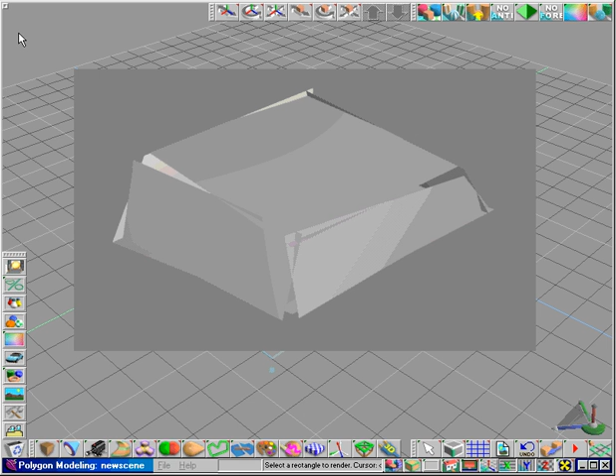The Triangulation tool can be used to divide faces into triangles and fix rendering artifacts that arise from faces that are non-coplanar. It is important to note that the Triangulation tool works on the entire object only, not on individual or select groups of faces. Also, the action cannot be undone.

From the Object Library of the Polygon Modeling Project, click and drag 2 copies of the candlestick object to the middle of the screen. Note how the faces in the middle portions are not coplanar. Select the second copy and click the Triangulate tool once. Note that once an object is triangulated, subsequent clicks on the tool will not further triangulate the faces.

Now do an area render. Note the difference in the look of the 2 candlesticks. Even though the first one has non-coplanar faces, the surface still looks smooth. This is because TrueSpace has Triangulate for the render engine turned on by default. This may not always be desirable.

However, by turning it off, note what happens to the first candlestick when we do an area render again. Notice the shattered look from all the rendering artifacts. Triangulation will avoid these regardless of the rendering settings.

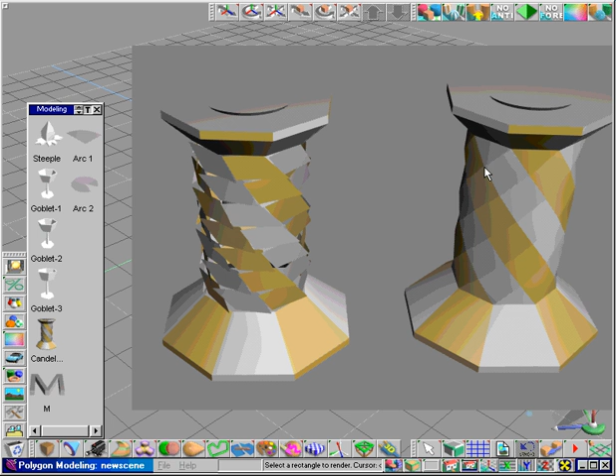Even though triangulation cannot be undone, it can be minimized. Select the triangulated candlestick and Boolean subtract the plug from the top. Notice how the faces on the base and the top have had the triangulation removed. The middle faces will remain triangulated. Undo the Boolean operation.

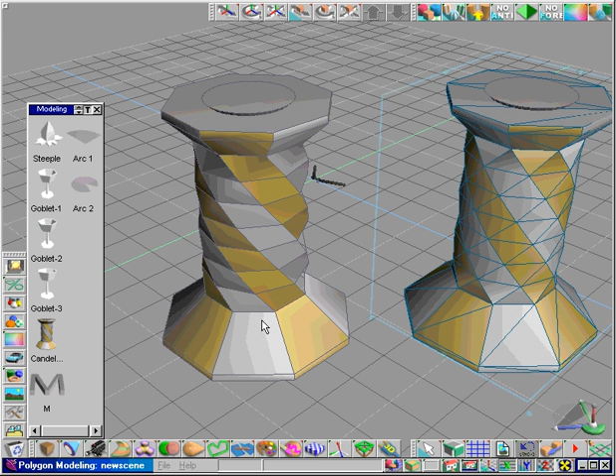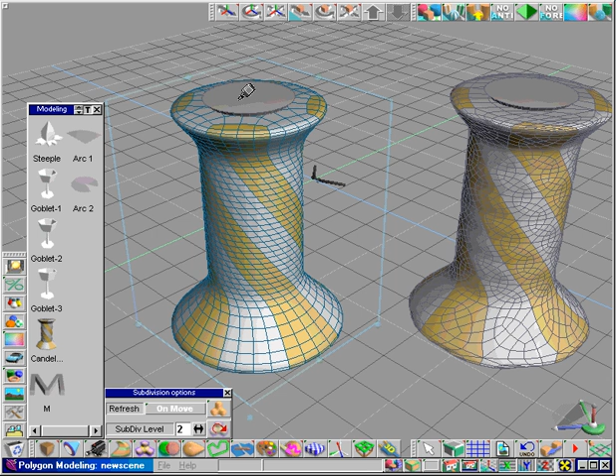Another use for the tool is preparing geometry for work with other tools. Click on the Surface Subdivision tool for each candlestick and note the difference of the division pattern created on the polygonal copy as compared to the triangulated copy. Convert to a polygon mesh and subtract the plugs from the top of each. The triangulated mesh pattern will no longer change.

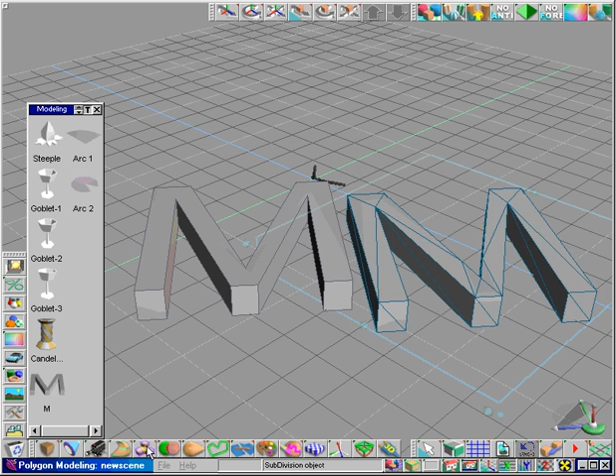Delete the candlesticks. Drag 2 copies of the M from the Object Library to the grid. Triangulate the second. Now surface subdivide both of them. Notice the improper surface construction on the first. Triangulation eliminates the concave faces and the resulting errors possible with faces that have more than 4 sides.

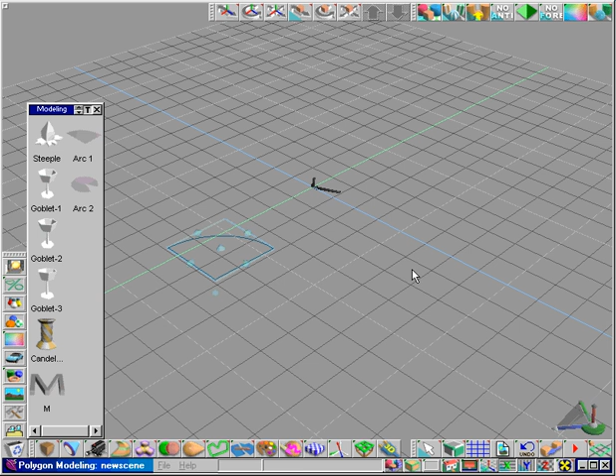Delete the letters. The Triangulation tool can also be used to divide faces in a radial manner. Drag arcs 1 and 2 to the grid. Triangulate each. Note that faces defined by 180-degree arcs will not always divide radially. This type of radial triangulation can prepare geometry for future manipulations. For example, with a few point edits in the Surface Subdivision tool, the triangulated arcs become prehistoric seashells.